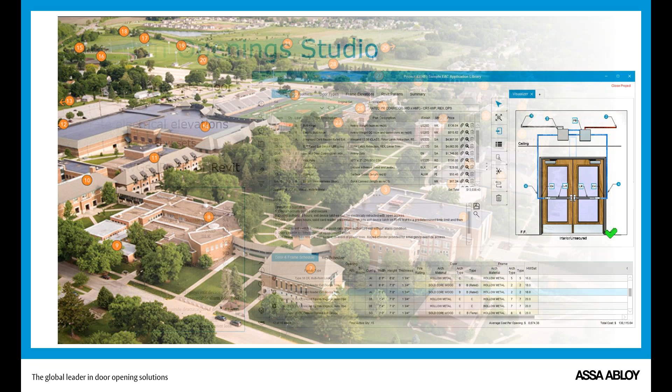So what do we have available? Openings Studio is the software program ASSA ABLOY created back in 2009, primarily as a specification writing tool for our spec writers. For commercial buildings, we would manually enter information into Openings Studio. We would select a product—on this sheet you can see the hardware set parameters.

Each of these are hardware components—so this is 4-butt hinges, 2 electrified hinges, an integrated lock set. We would manually enter all of this information into Openings Studio, which would produce the Word document you'd see in a specification section.

We quickly found that there was a way to incorporate and tie our efforts more closely to what the architects were doing.

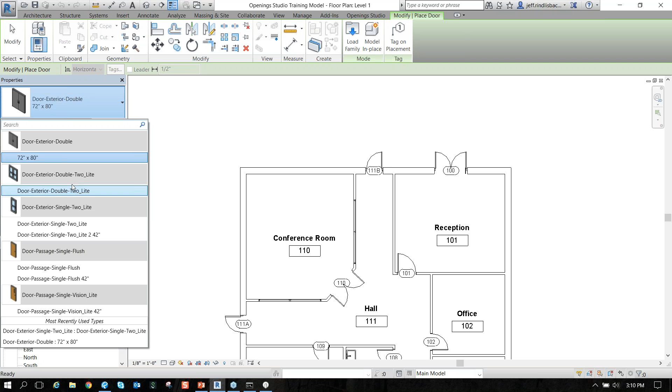Many of you may be familiar with Revit. This is Revit, and when an architect wants to add a door—say to this conference room—they would go to the Architecture tab in Revit and select the door category. Here at the top left corner are all the doors available out-of-box in Revit for this project. So if I wanted a double door that was 72 by 80 inches, I'd select that door and simply drop it right there in the plan.

This is standard practice. A lot of architectural firms have done detailed things with their doors—they may use a combination of out-of-box Revit doors, but also go to great extents to create door families, which is what these little things are. Every element in Revit is a family.

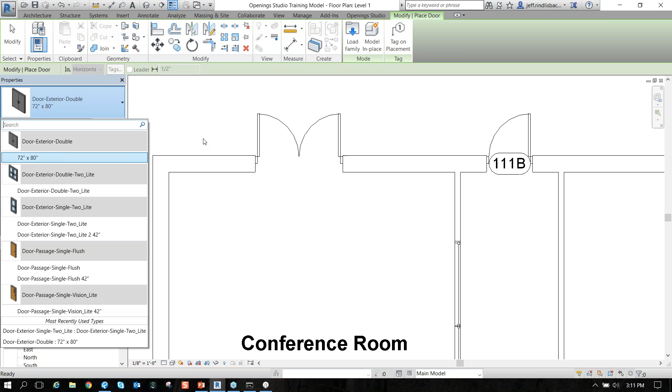So this wall, this door that I'm on, is a door family. This wall is a family. If I wanted to choose the window in that wall, that's a family too. So a Revit model is made up of several families.

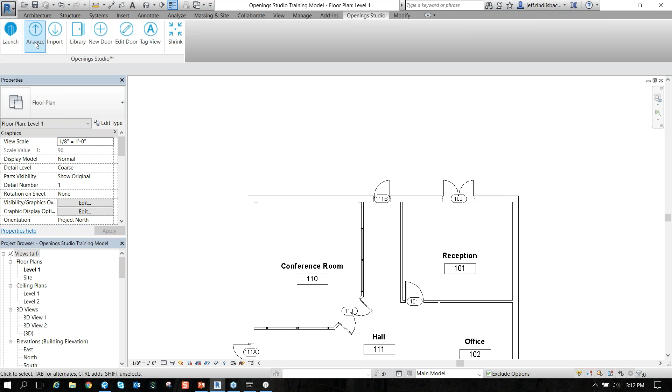So what we came up with is a way for an architect to send us detailed information about their project through Revit. Up here at the very top, you can see this tab called Openings Studio. By selecting that tab, the architect can analyze their job. Openings Studio goes through and looks at all the doors that are in the door category.

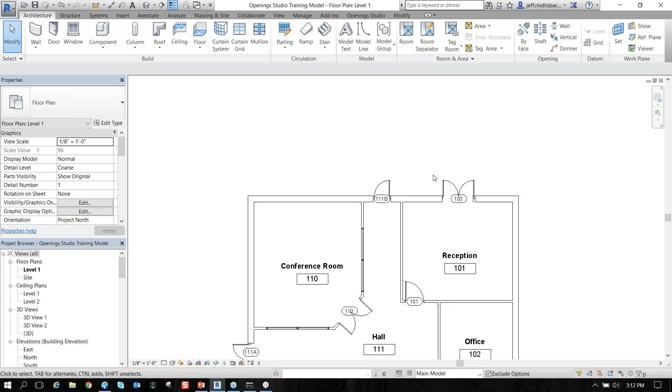So all of these elements that are in the model, these families that are in the door category, are going to be picked up by Openings Studio. In addition, the geometry for this project is also going to come in.

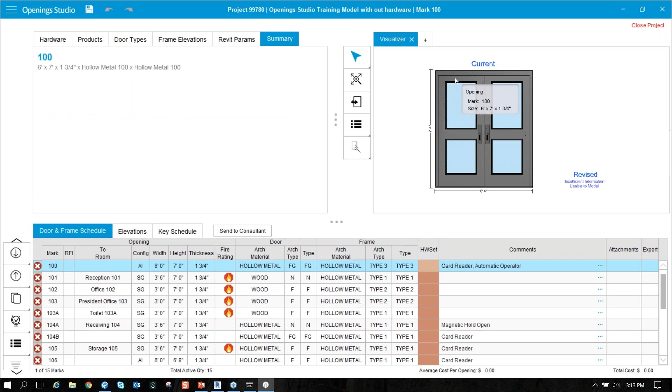So this is what Openings Studio looks like when a project is first analyzed by an architect. Up top is all the door details, the opening details, broken up by hardware sets, hardware products, door types, frame elevations, and at the very bottom is our door and frame schedule. At the top right is a visualizer that lets you see what door families the architect used in their Revit model. So what we do with projects like this is we take the plan views that we get and the door and frame schedules.

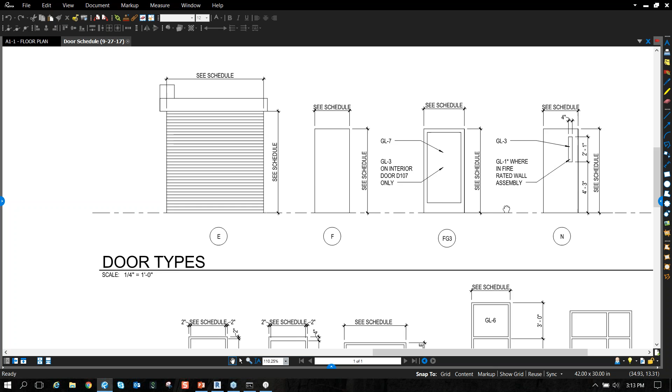We look at the elevations of the doors that the architect has created. Many of you have seen something like this - there's the flush door, a full glass door, a narrow light, and the different frame elevations. So what we would do in Openings Studio is make those into industry standard door families.

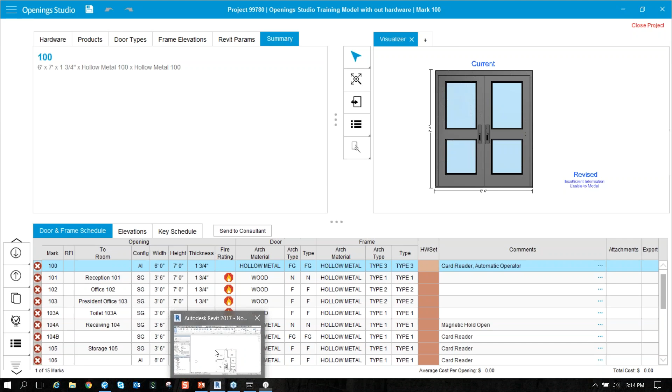Once that's done, we have a really powerful tool to help push additional information downstream. Architects will oftentimes share their models with a general contractor. If they don't share the models and you're working with a general contractor who's using Revit, they may redraw the entire building and have that available for the as-builts. So when they do share that model, and when the project comes into Openings Studio, let me show you what this looks like.

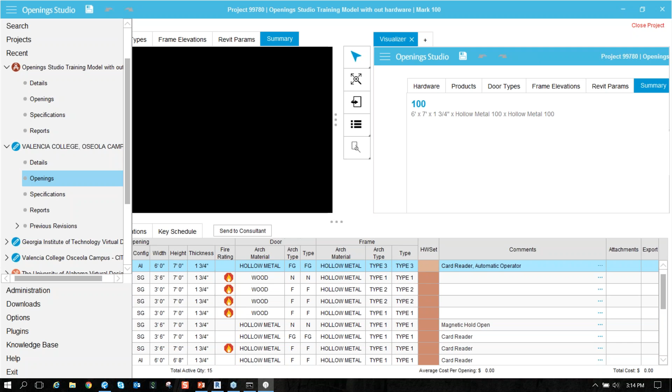This is a project that has been completed, so the hardware sets have been assigned.

So you can see here, down here at the bottom, is opening 100. It has all the detailed information about the door - it's a 6 foot by 7 foot, 1.75 inch hollow metal door with a hollow metal frame. It has hardware set number 6, and it even gives you a description of what hardware set 6 is: a pair of egress doors that are in a corridor, and they have access control.

You'll see right away that there is a power column in this summary page, so anything that has a lightning bolt in this screen is an electrified product.

You can also see down here at the bottom is the notes - these are operational narratives that are assigned to each hardware set. So for this opening, doors are normally closed and locked, and entry is by presentation of a valid credential to release outside trim, or by mechanical key override.

Each of the products that exist up here in the summary are hyperlinks. So if I were to click on that hinge, if I wanted to see exactly what that hinge is, all I have to do is click it, and it gives me the detailed information about the T4A3786 or T4A3786, along with the electrified components for that product. And again, they exist for each line item that is highlighted in blue as a hyperlink.

So one of the things that happened when we met with the stadium, and also the college and the healthcare facility in my examples - we met with you as facility folks, owners and representatives, to establish what your standards are, and we would write hardware sets around those standards. I want you to remember that for a portion of the presentation that's going to come up in a little bit.

The other thing that happens - I explained that the door that comes in automatically from Revit, the door on the left in this visualizer pane, is the door family that the architect has used in their model. Remember that every element in an architect's model is a family, so this is the door family that they chose for this location.

What we do is take that door and frame elevation sheet, and we try and match it up with something that is industry standard. So in this example, the architect chose nomenclature like an F door for flush, but if they were to call these something different, we would convert that into something our industry would understand, all the time maintaining the architect's door type and door material, frame type, and frame material. We would just convert that into something understood by our industry.

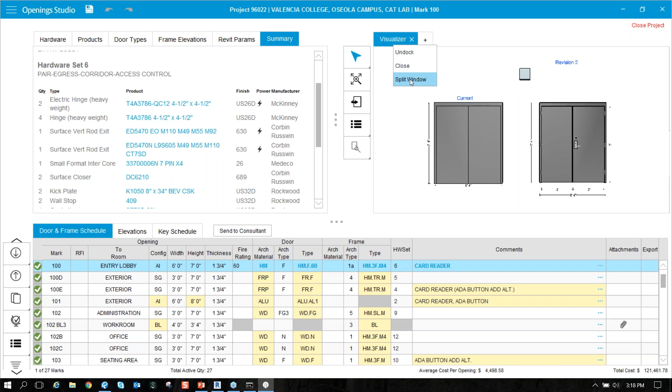In addition, and this is where the detailed information comes in really handy - one of the things you can do with a project that comes from Revit is adjust the visibility and how you see these openings.

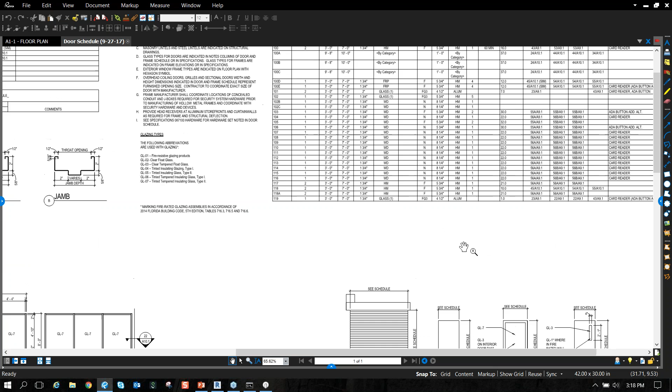So I was in a meeting last week on the phone with an architect, and we were trying to do that dreaded door-by-door meeting that went through each of the access control locations, and then they wanted to go through the fire-rated locations. The architect was sharing their screen with a PDF of the hardware sets and a PDF of the door schedule, just like this. What he wanted to do was go door by door on the door schedule and make sure we had covered each of the doors.

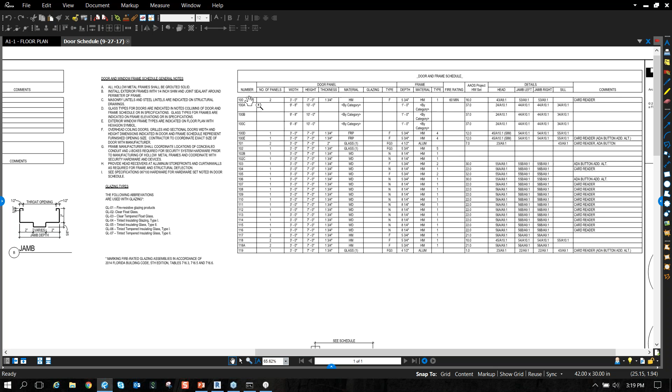So what he would do is use this document. He would find door number 100, and see that it was in hardware set number 16. Then he would go to the PDF of the hardware sets and try to find hardware set 16, which would identify what hardware was required for door 100.

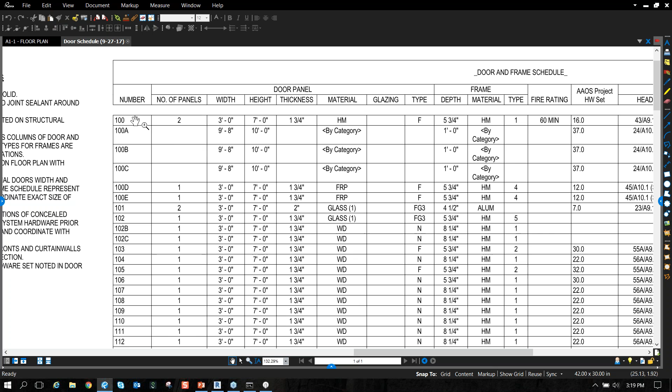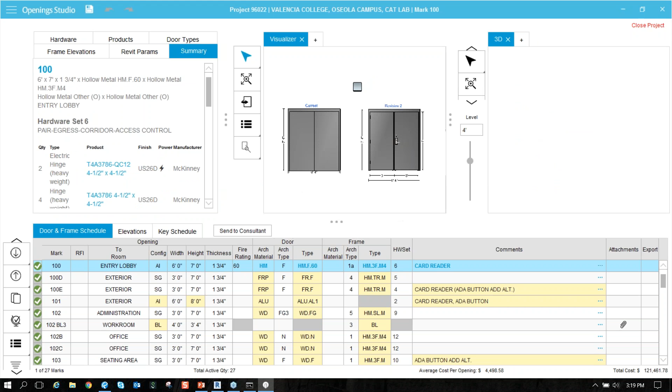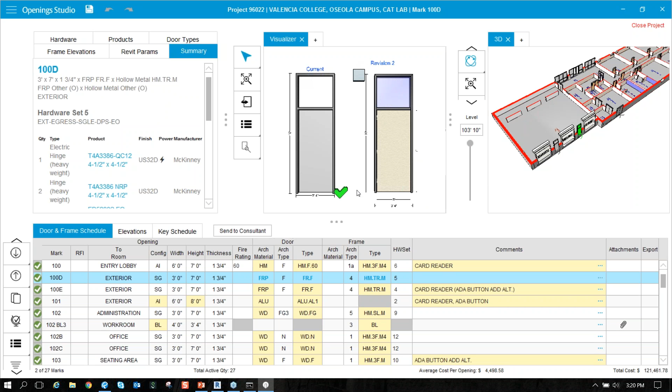When you select an opening down on the door and frame schedule, it actually highlights that opening where it's at in the floor plan view. It shows you the current family that the architect used, and then the revised family, or what we as a specification team are interpreting that opening to look like.

These doors can be flipped around. This happens to be a door coming from this training area, and the architect had asked for it to be exit only—you can see the hinges on the door. It's an FRP door with a piece of glass, a transom panel above it, but the exit device is exit only with a parallel arm door closer.

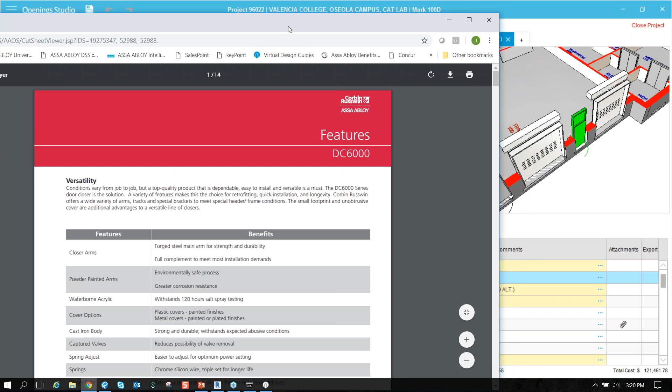If you wanted to see what that parallel arm door closer was, you could click on that DC 6210 to see the cut sheets that are loaded in. The other thing you can do is click on installation instructions.

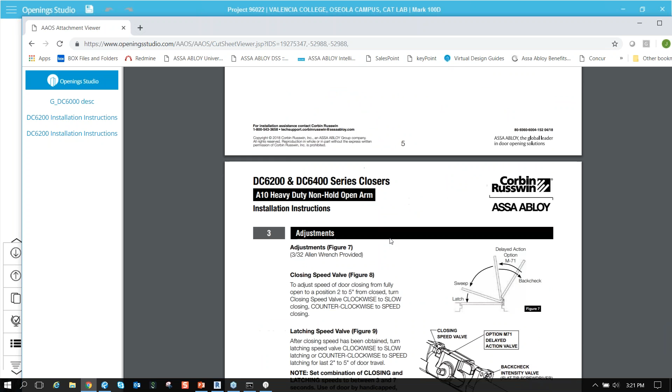So if you wanted access to the installation instructions, which include the adjustments—if you're being asked to go out to a door because the closing speed or sweep speed is too fast, you can utilize the information in Openings Studio by clicking on the opening they've told you is a problem, then select the component or piece of hardware in question. Any of that information loaded in here you could access from your mobile app and see exactly how to adjust that door closer.

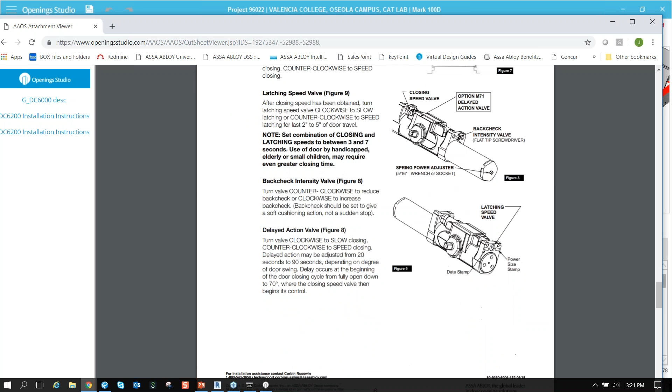The other thing that can be done with this is warranty information can be loaded in, and I'll show you that in just a moment.

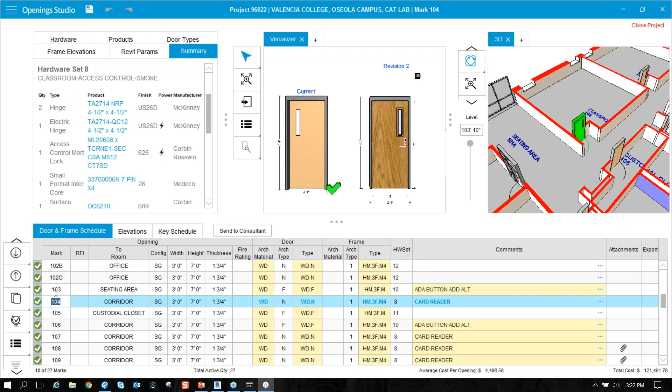So we can load in access control information about these doors. Like I said, we can do warranty information, cut sheets, or wiring diagrams.

The other thing that happens with this is we allow security consultants to utilize the information in Openings Studio. So if we've written the specification and a security consultant is on the same project, we would allow them to collaborate.

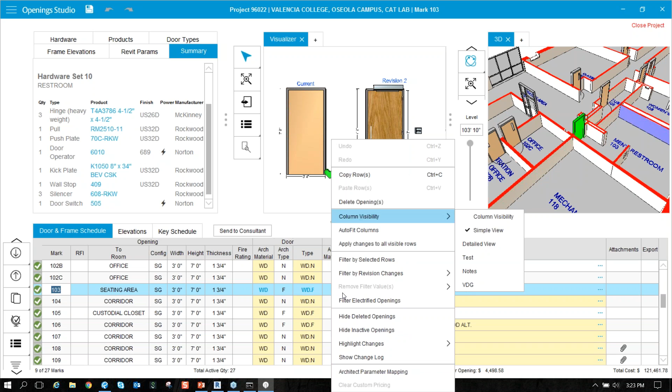One of the first things you can do with the door and frame schedule is right-click down below and filter by all of the electrified openings. That's going to look for that lightning bolt in any of the hardware sets that exist in the project, and if that lightning bolt exists, it's going to include that door in the schedule down below.

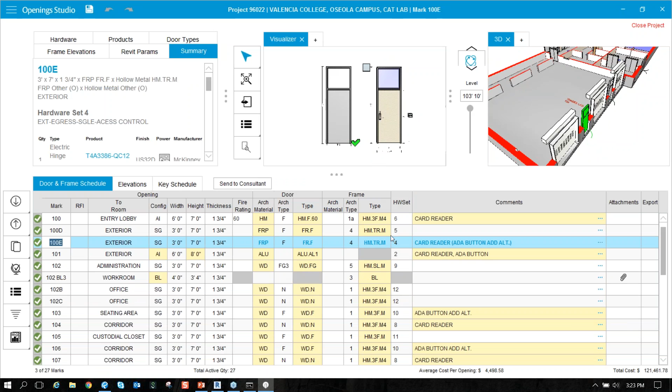So we can quickly see that some of these share the same hardware set. We could even filter by just the hardware set that we want to see. So if we wanted to clear the filter, we could clear it out and just filter by hardware set number 1. And we're only going to see the door that has hardware set number 1.

So this door happens to be an exterior door. It does have ADA operators. Let's see what else is on the opening. So we've got standard door pulls with an exit device, the ADA operator, a power supply that is running the latch retraction of the exit device, and this exit device has a built-in request to exit.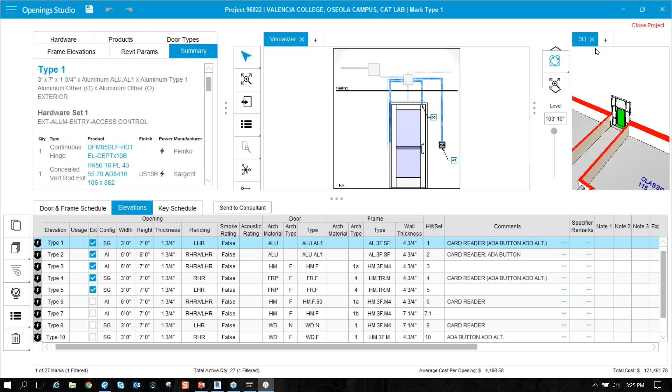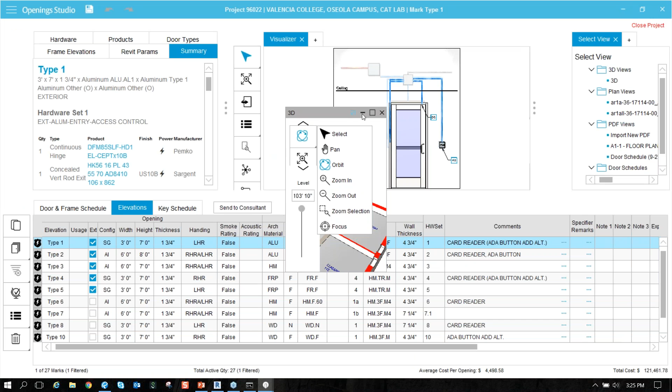So if I scoot this in, maybe slide this over just a little bit, each of these screens can be undocked. So if I wanted to undock that and maybe put this on a separate monitor and have everybody look at this screen while I'm going through the door and frame schedule, it just keeps everybody kind of on focus and on task. If we're just addressing access control doors, it allows us to address the access control doors, and that's it. So each of these can be undocked. You can redock them and it will go back to where it was.

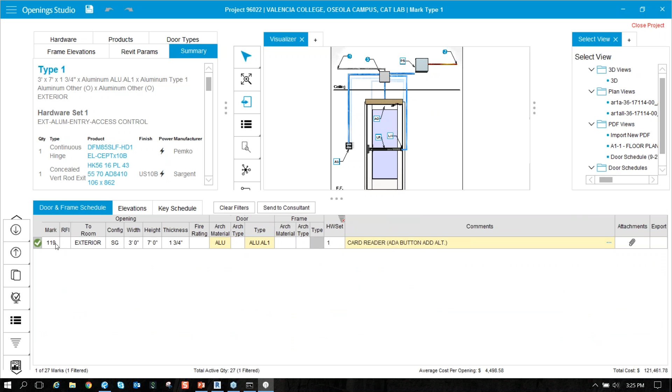So let me show you the electrical elevation. Again, this can be flipped around. So what it's doing is it's taking the door and frame information that exists for opening 119, and I created a new elevation for it. And now our security consultants can collaborate on this, and they're using the hardware set that came directly from the specification. So they've got the same hinge, the same electronic exit device, same door pulls, same mechanical hardware.

It also includes wiring diagrams, so there's the wiring diagram that goes with that product. But it gives them an elevation view of how the opening is going to be wired up.

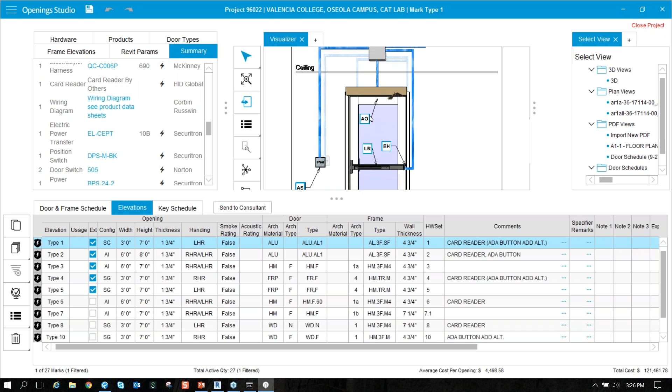In addition, it tags each of these components. So if I were to see this, AS is an actuator switch, so it's an ADA actuator. LR is latch retraction. EH is an electric hinge. AO is an auto operator. And these come with a legend that would explain what they are. The PS, the power supply - you can flip the door around and you can see that, again, it has the AS and the door contact. So we've created electrical elevations for each of these openings.

And one of the things that I know about access control is that not every facility wants these access control doors to function the same way. So the operational narrative and this visual are a powerful tool in making sure that things not only have power where they're required to have power, but are going to function in the field the way that they're supposed to function.

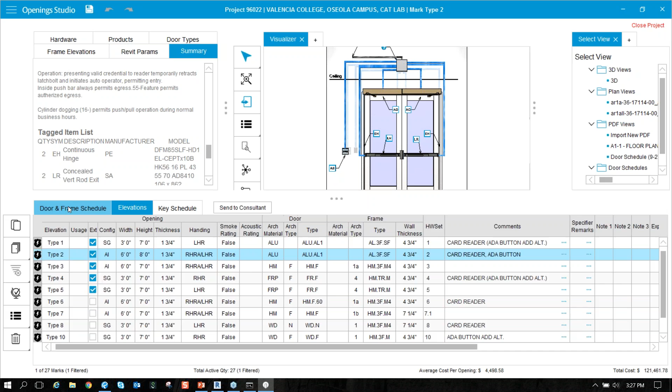So this operational narrative came directly from the hardware set assignment that's in the door and frame schedule. But that information can be shared with the electrical elevation. So now our security consultant or low voltage contractor is working off the exact same information that's included in the specification.

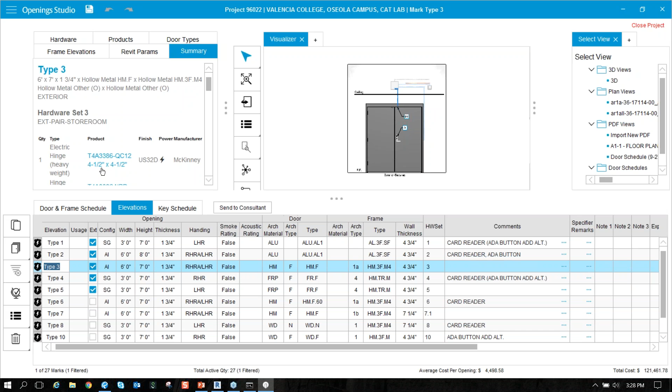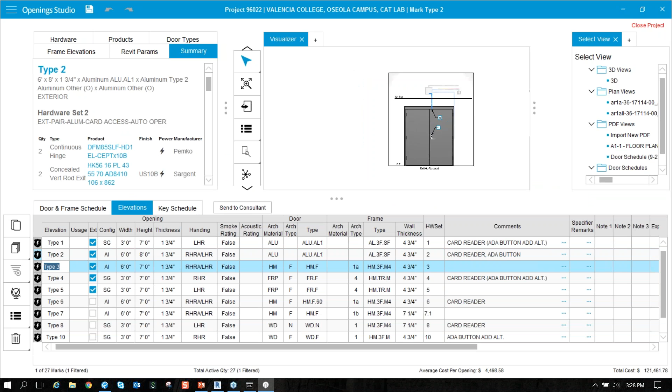These can be inputted, or the export of these - I can print these to a PDF. I can even print these to a Revit file, and bring these in a sheet back into Revit. And again, this is for our security consultants.

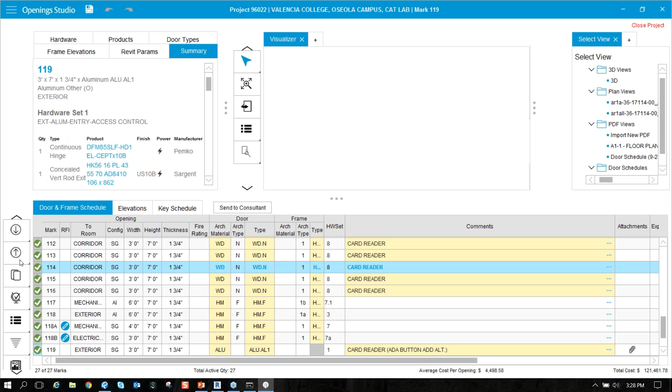And it's very easy to create one. The way that it works is once the hardware sets are assigned, if I were to come down here to the bottom and add a new electrical elevation for an opening - I'm creating an elevation and I'm calling it delete because I want to delete it. Once I'm in that electrical elevation, really the only thing you need to do is click this little button right here and it automatically labels things for you.

That's as simple and easy as it is to do.

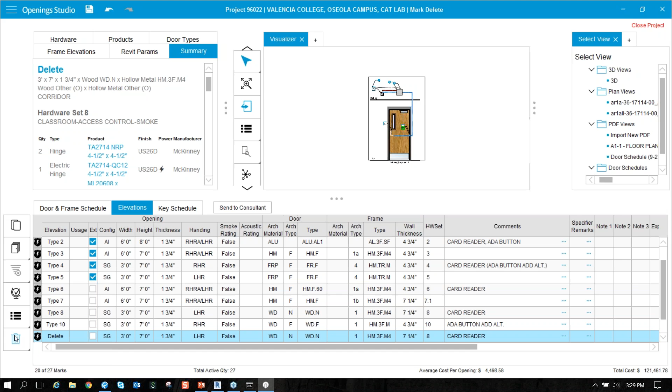Something else that's new is this keying schedule. What this does is put in numerical order all of the openings that exist, and it highlights any of the products that are keyed, allowing us to put in key symbol and operated by—a narrative of how that opening is supposed to work—plus the bitting information if you chose to do so.

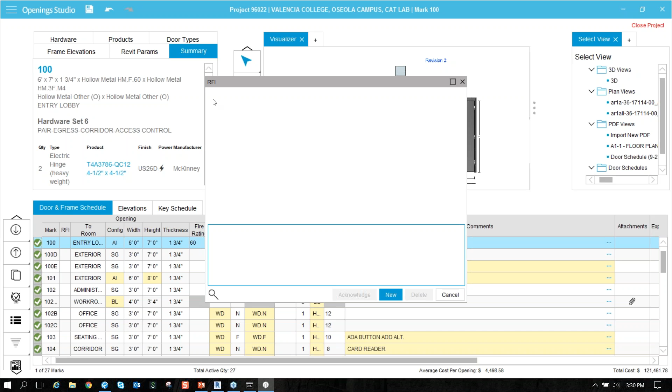The other thing that is extremely valuable is this RFI column. It's used a couple of different ways, including during the DD and CD phases between our specification consultants and the architect to iron out issues. So if a card reader needed to be added, the architect could click on the RFI column, type in 'add card reader per Paul Walker,' click new, and it would create that RFI.

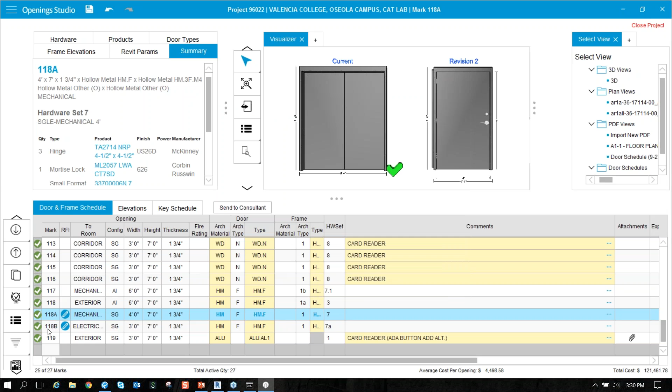I added two RFIs to this project because in the documents that came for this project, opening 118A used to be a pair, now it's a single—a 4070 single—and door 118B was added to the project. Within Openings Studio, I made those notes in the RFI column, changed it to a 4070 single door in Addendum 5, and the same for Opening 118B, added as a 3070 left-hand reverse door in Addendum number 5.

I bring this up because this RFI column could be used by you as you're collaborating with an architect. Many of you have been asked to review, not shop drawings, but the specifications before they go out to bid. This would allow you to have all of that information right at your fingertips.

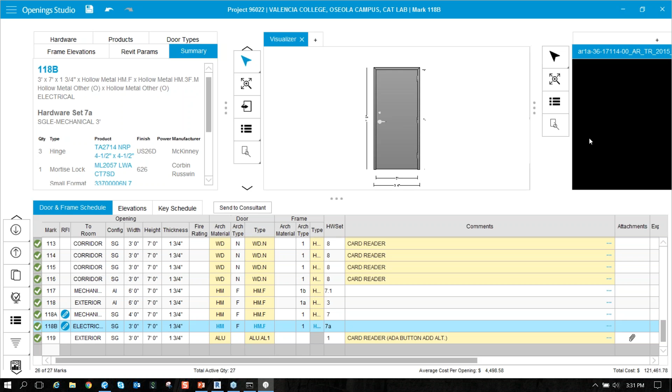The plan view isn't the only thing you can see—you can also see a typical building view, and this is interactive both ways. You can click on a door in the plan and it will take you to where it's at in the door and frame schedule, showing you that detailed view, or you can click on a door down in the door and frame schedule and it will take you right to that opening.

So when you are being asked to review for compliance—that not only are your standards being met, but card reader locations are where they're supposed to be—all you would need to do is log into Openings Studio and start at the very top of the list. This is a simple 27-door job, so it's not real difficult, but you can simply start at the top of the list and work your way down.

You can quickly see, oh, that's that door, it's the exterior door, the one that's exit only. This one was the one we had discussed that needed to be a card reader location, so that's where they're going to funnel people in. If you had a question on one of the products—what is the auto operator being proposed? It's the 6000 series by Norton. Great, that's what we talked about. Any other information you would need is right here at your fingertips.

The other time this comes in handy—well, we'll get into that in just a moment. So you can use Openings Studio to do your reviews at either the CD or DD phase, whenever you're being asked to review the specifications before they go out to bid.

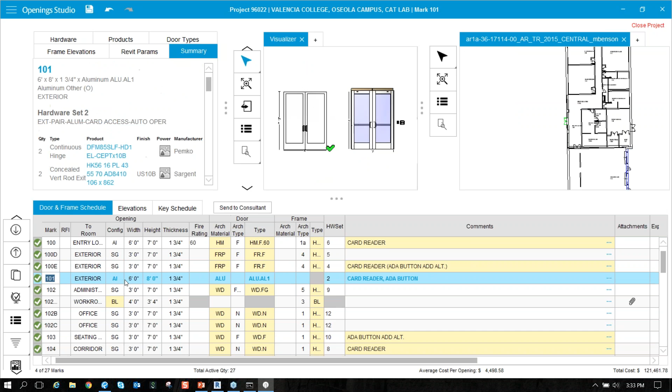Another couple of neat features about the program: first, anything highlighted in yellow is a change from the last time the architect sent the project to Openings Studio or used the Analyze feature. This is really helpful, not only for specification writing, but for you as individuals—if you've reviewed it once, and now this is the second time you're reviewing it, maybe you spot check a couple of these, but focus on the highlighted yellows to make sure they are in fact what was asked for or needed for the project.

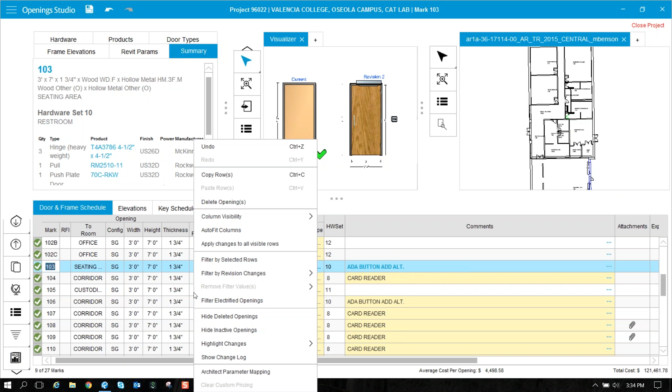There are all sorts of reports that can be run from Openings Studio. You can do a comparison report comparing one version to the other to see what changed. You can also show the change log, and you can create a custom filter, so if you wanted to filter by any of the new openings or deleted openings, anything that's a pre-existing opening.

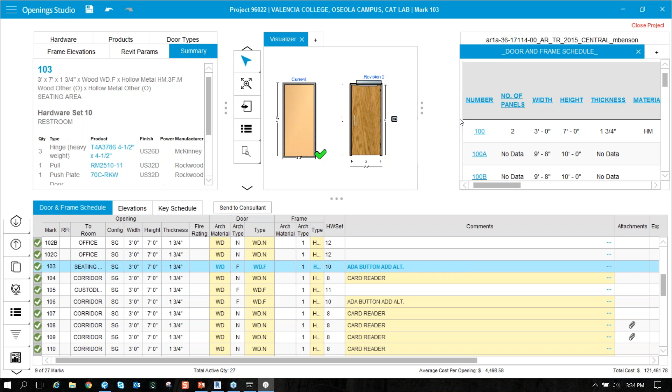One of the other views available in the software is the door schedule view—this is an interactive door schedule. You'll notice the blue highlight; these are hyperlinks. Again, when you click on the door here, it'll take you to where it's at in the door and frame schedule. This allows us to filter the schedule shown below, which is extremely helpful when dealing with a project that has more than one door schedule.

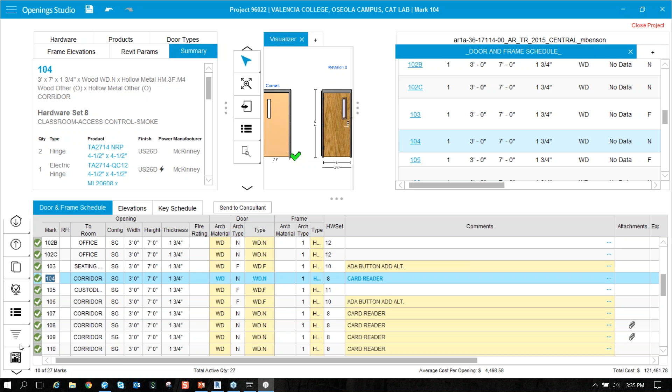If you just wanted to focus on doors that were on the first floor, and there was a first floor door schedule, you could come down here and do the schedule filter, and it will give you a list of each of the door schedules created in the project. In my example I've only got one, but if there were two or three, all you would do is click on filter, then filter on selected schedule, and it would drop off any door that was not on one of those door schedules.

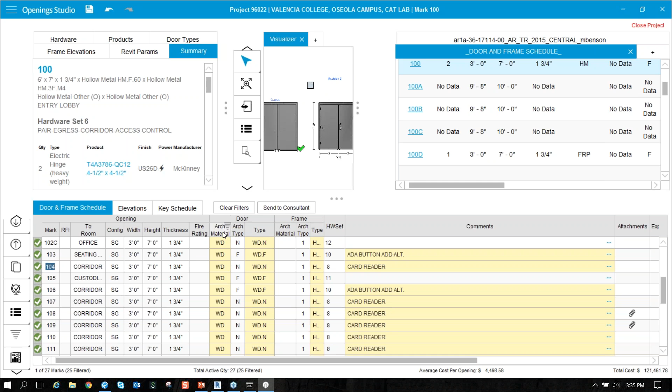Extremely helpful in navigating and isolating, drilling down to see just the openings that you want to see. If you've been asked to view all of the wood doors on the project, you can filter by any one of these columns. So right now I've got only the wood doors being filtered.

If I wanted to isolate the doors that just had card readers, now I've got two filters turned on, one by wood door and the other by card reader, and I can make global changes to each one of those. I could even turn on this button, which is an apply changes to all visible rows.

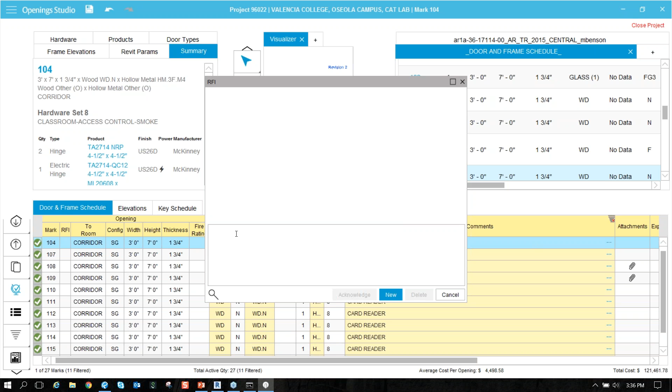When I do that, the top of the door schedule turns yellow. And if I were to add an RFI, so if each of these doors that were wood and card reader needed to change to hollow metal, I could say, please change this door to hollow metal. And when I hit new, because I've got the apply changes to all visible rows on, it's going to put an RFI in there for every one of those doors that's on the schedule.

Okay, so we've talked about specification writing. ASSA ABLOY writes door hardware, door frame and hardware specifications. We have a really unique tool allowing a contract hardware distributor who's supplying a project to upload the as-supplied information. So this right now is as-specified. We can actually pull in the as-supplied information into this project into Openings Studio.

So what does that mean to you? That means when you come in here and you get a phone call from somebody that says, my classroom door, this morning I noticed that there was oil leaking down the face of that door. Rather than going to the door to verify that the oil was leaking down the face of the door, you could log into Openings Studio, click on that door.

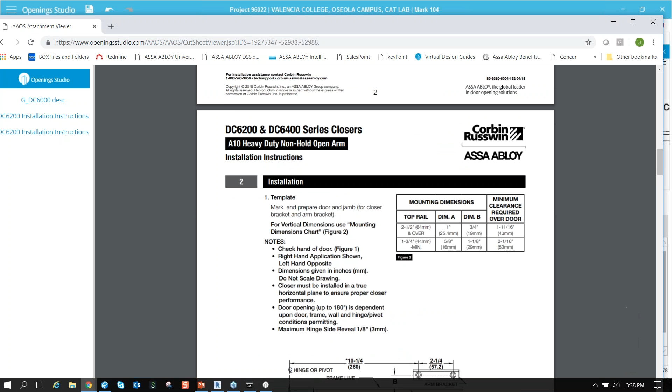You can see the opening and what it looks like, and you could actually click on that DC6210, get any installation instruction or adjustment instructions. But even more important, you're getting the product number, DC6210.

You can see that it's a left-hand reverse door. You could actually throw a closer body if you've got one in the shop. You could throw that closer body in the truck, go to the opening, and maybe eliminate the need to go back a second time. And you can do that with everything.

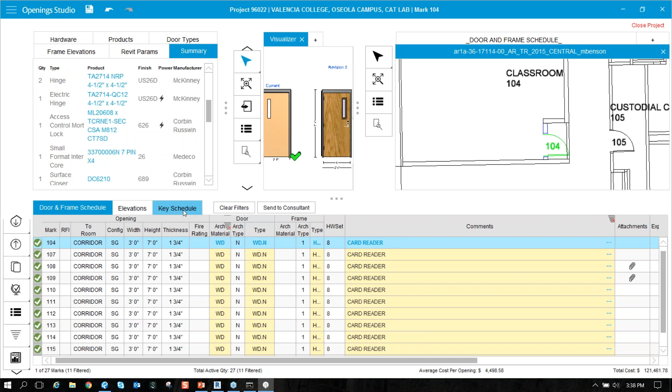The keying schedule - if a key breaks off in door 105, and you need to know how that's keyed, as long as the information is provided by the distributor and can be updated, then the information that's in Openings Studio is now the as-supplied, not the as-specified. And that is true with our electrical elevations as well.

So with that information, with the information in Openings Studio now changed to as-supplied, we're ready for the next step, and that is to apply QR codes to each of these doors.

So one of the functions in Openings Studio is to print smart tags, and what that will do is print a tag for every line item in the project. What you would do then is switch from the desktop version of Openings Studio, and log in on your smartphone, either a tablet or a smartphone.

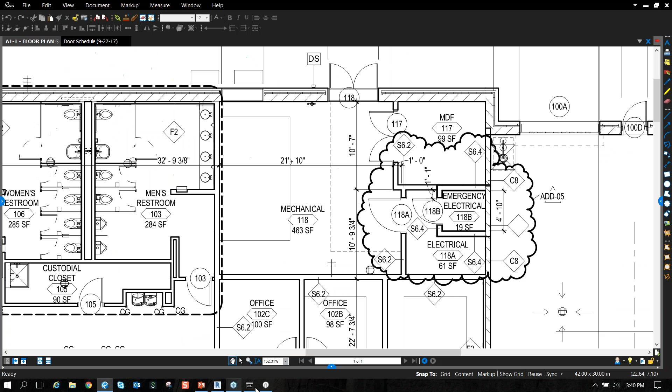You would then go to the opening, and this can be done by the general contractor, by the distributor, or by you. What you would end up doing is at the opening, you would stick the QR tag on the door frame. So you stick that QR tag on the door frame, and then you can scan that QR code.

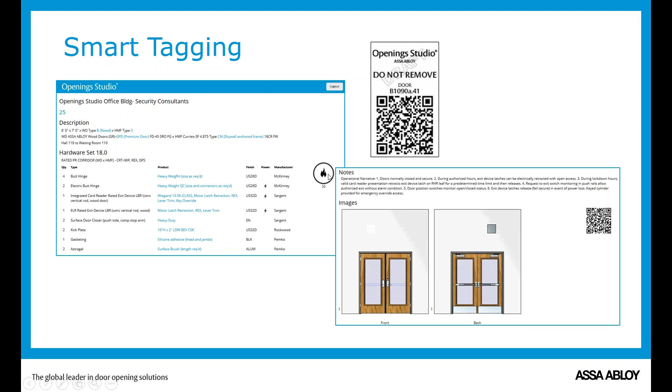So once that QR code is on there, it's what it'll look like. This is a project that we did in Florida. This is door 119, this is door 108.

Once you get that QR code, you could scan it and it would take you to this screen if you didn't have access. If you do have access, your screen is going to look a little bit like this. You'll see that it's more information, more detailed. This is door 119, same door.

So this is the opening level. The button here is the edit button, this is the copy button, this is the notes, and up here are the survey or inspection buttons, and then this is the ability to scan a QR tag.

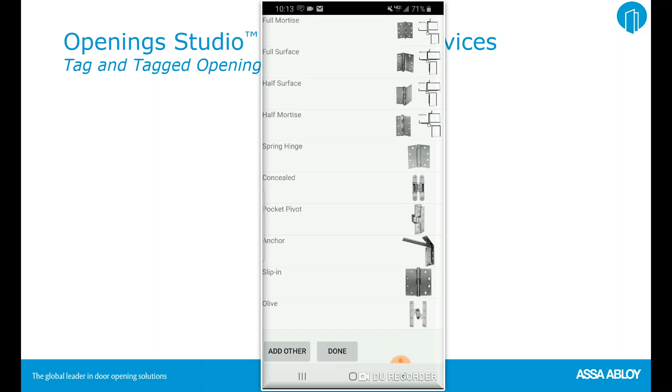Down at the bottom, I need to add a piece of hardware that doesn't exist, and I chose a hinge. So you click on hinge, you click on the hinge type, it's asking if it's full mortise or full surface - I choose full mortise. Enter the quantity in, enter the weight, standard or heavy weight, and then any of the sizing, and then any of the options that are available for those hinges.

And then when I'm done, I click OK, and it will take me back to the opening screen, and now that component or piece of hardware has been added to that opening.

The other thing that's available with this mobile app - so we've now stuck a QR code on the door frame, and now we have an opportunity to either do a site survey or a punch list or an inspection. So the very first thing, again, it's at that opening screen, and I clicked on the little inspection button. What I've got available is a new fire door inspection, a new smoke inspection, an egress inspection, or if I'm the general contractor, I can punch out the opening.

So I choose fire door inspection, and I go down and find that the lock set is not compliant. I click on the lock set and say that it's missing or damaged - it's got damaged fasteners. And I go down to the closer and make a selection there. When I go back to the front, it tells me exactly why my opening is deficient.

And it's missing those things. So this would allow you to print out a report of each of the openings and what needs to be done to them. The nice part about this is you don't ever have to say 'at opening 119, this happened.' When you're logged into the app, because you're on opening 119, anything that you say or do to that opening, it knows that it's on 119.

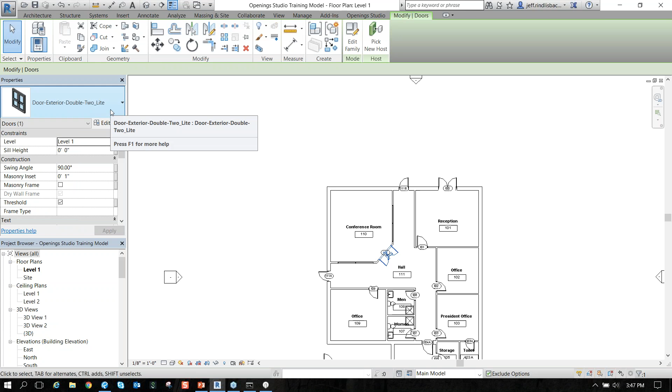Now comes the fun part. And that fun part is where the stadium and the college that I talked about are utilizing this information. Many of you may have BIM standards in your specifications where a certain level of BIM content is required to be turned over. I would ask, why not have that BIM model, rather than generic doors available in Revit, updated with as-supplied information?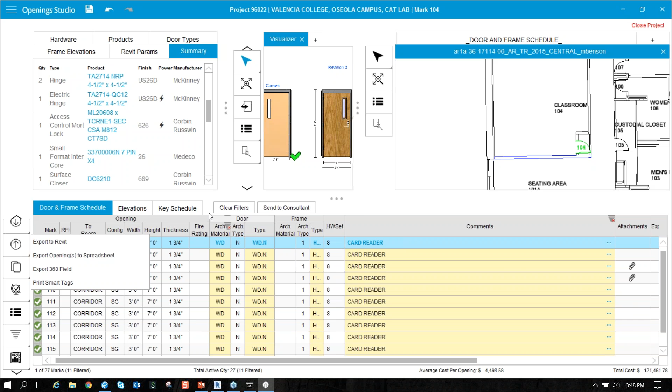So one of the key things about Openings Studio is that once we have the information captured in Openings Studio, I can export this information back to the Revit model. And that information includes the hardware set number, but it also includes the tags that exist on the electrical elevations. So if I wanted these door tags to show up—this card reader, lock and door contact—those could show up in my Revit model. And the hardware components themselves can be sent back to the Revit model.

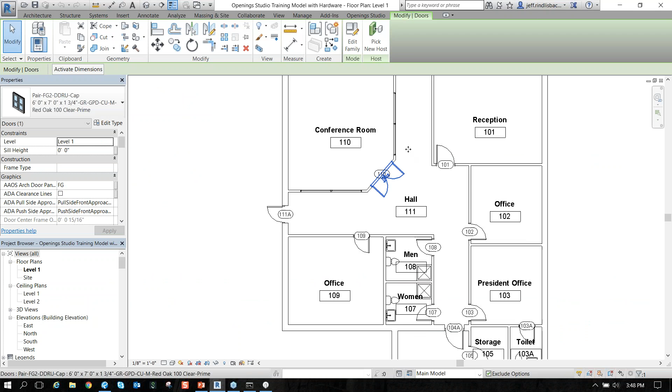Many of you use programs to help create work orders, and if the app or program you're using is pointing toward Revit and extracting information from it—if these doors, which are ASSA ABLOY doors with ASSA ABLOY hardware set numbers and tags assigned to those openings—if that information is in the program, then when you point your apps at Revit, the hardware set numbers and hardware products are going to be available for you to use.

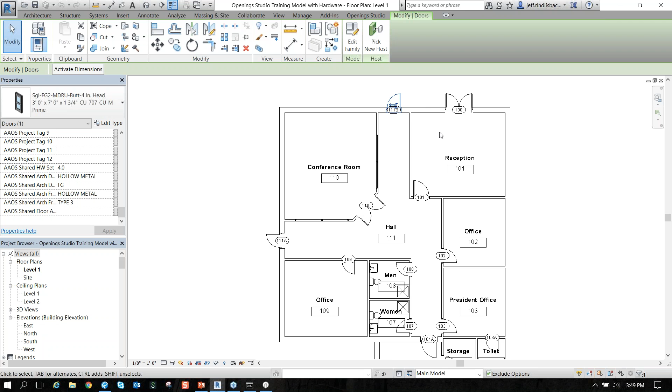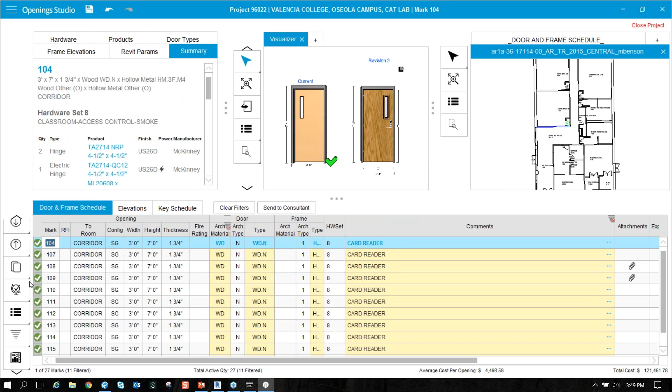So the last thing I want to talk about is what we can then do with a project like this. Essentially, what we've done is capture some pretty difficult openings to communicate. I'm sure many of your facilities have design guides in place that represent your standards and what's to be used and when. What we can do is take this information—this is now as-supplied information, real world stuff, and it's on some pretty detailed, complex openings to communicate to an architect.

What we can do with this is create a library in Openings Studio and turn it into what is called a virtual design guide. A virtual design guide is a project in Openings Studio that is just visible in a bit different format. So it would look like this.

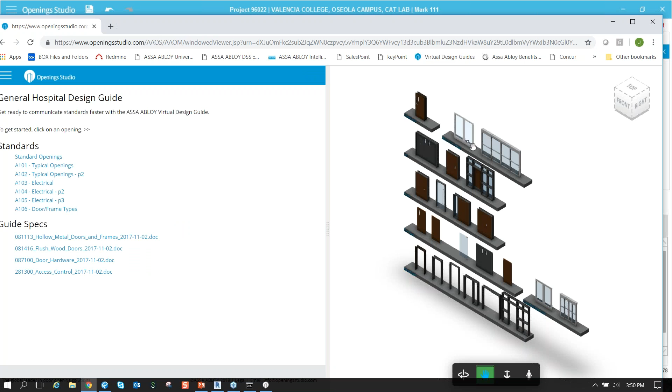So if I click on an opening here, you can see that these images look a lot like the images that come from Openings Studio—it's because they are coming from Openings Studio. So what this does is, I click on this door and it shows me the door number and its description, and here's the hardware set with the operational narrative.

So what we would do is work with you, and ask some tough questions about door hardware, like what doors on campus you go to on a regular basis that you want to make sure never happen again on any project moving forward. Within Openings Studio, we would create a new door family and provide the solution to that problem. And in the operational narrative or the notes, we would say this door family is to be used at all cross-corridor doors.

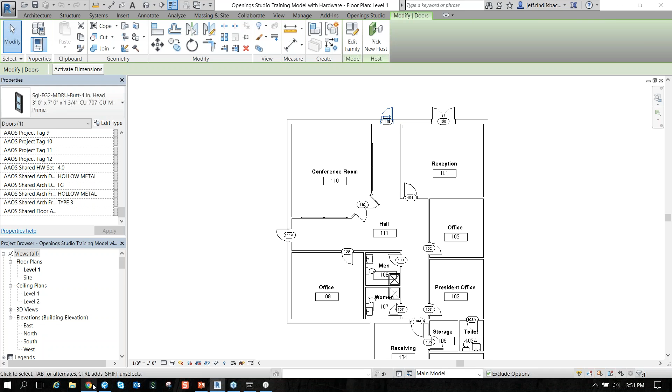When we create it in the virtual design guide, the virtual design guide is going to read that exact same information: use this opening at all cross-corridor doors.

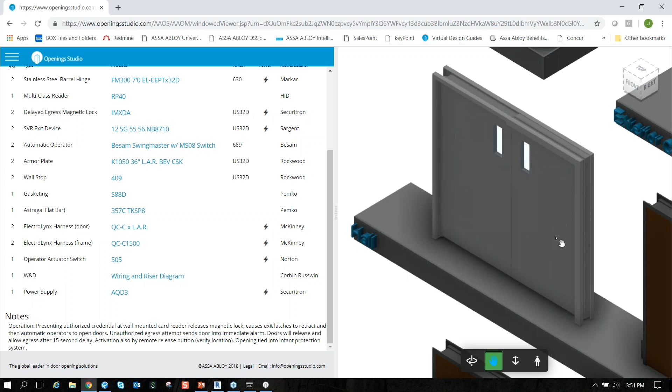One of the best features is that as an owner you would share this with an architectural firm and say, these are our door families. They represent all of the components that make up the hardware sets, with detailed information about the door type and frame elevations. I want you to use it when you start your next job, rather than clicking a new door and choosing from the doors available in Revit.

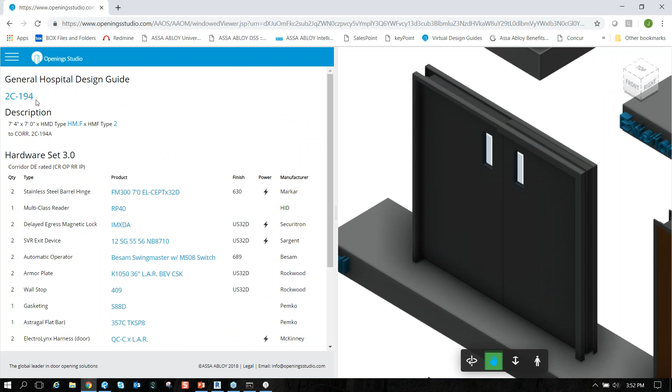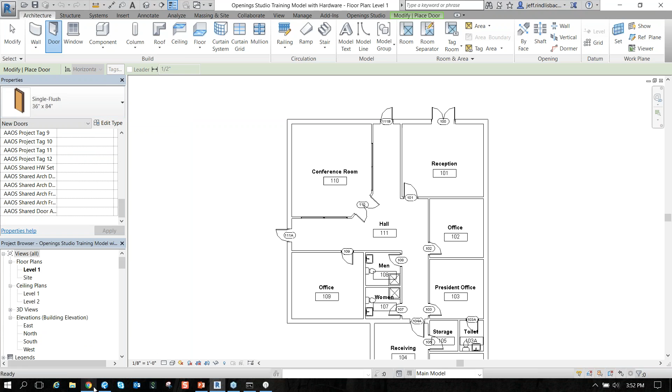We can actually send each one of these doors and export it to Revit. So these door families, whatever they're called—this one is called 2C194—when an architect downloads those door families, they would click on door, see that door, and drop it. So if I had a cross corridor door, I'm grabbing that cross corridor door and placing it exactly where it needs to be.

Obviously, we can write specifications and we will continue to write specifications, but we can offer so much more. I think the most important thing I'd want you to remember about this presentation is that we need to start somewhere. I shared the three stories about the stadium, the healthcare facility, and the college we did. All three started the Openings Studio journey in different phases.

To recap, we can provide as-built information back to the Revit model if needed, or that information can reside in Openings Studio for you to digest as you'd like. We can greatly enhance not only the look but also the coordination of your access control locations.

The punch-out is tied directly to the products that are in the specification and as supplied. We give you the ability to make a change to an opening, which means that even if you didn't start with a project in Revit, and we did not write the specification, that doesn't mean we can't start with an on-site survey.

We can use the app to go to a door, click on add new opening, and put all the information in there about the door and actually assign hardware sets that way. We can do annual fire door inspections, life safety inspections. I hope you understand how to smart tag, and how to use the mobile app versus the desktop application.

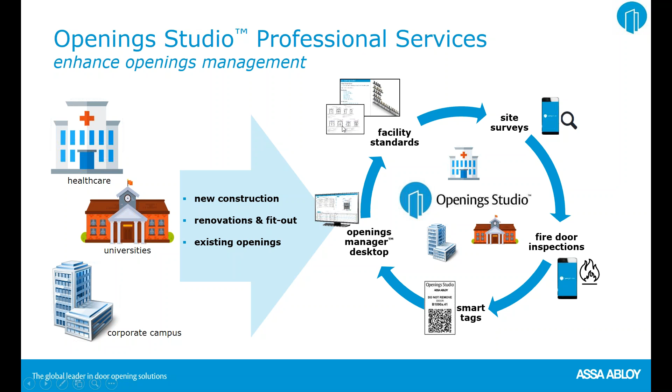But maybe it starts with QR codes—maybe it's an existing facility. We go out, we tag the openings, and it comes into Openings Studio. You can create a virtual design guide, so the very next project, the architect is using the door families you're telling them to use.

So there's potential in capturing door, frame, and hardware information. Again, it's important that we start now. Let's start with the next project. Let's start with your access control locations or your fire doors, and let's get these things into Openings Studio, which will allow you to benefit from all of the other information.

Being able to use it to maintain your facilities, and how to turn that into something that can be shared with an architect that is more powerful than a Word document. It gives them really everything they need in order to provide to you what you're asking for.

Yes, in addition to cutting down on the wire runs - let's see if I can grab that elevation - power consumption is another one. So we've got power supplies that are controlling locks, exit devices that have reduced power consumption. They require less power to operate.

It's going to save, over the life cycle - well, Jeremy can actually provide that information for you. But in addition to cutting down on the wire runs, we've also developed products that are consuming less power. They're making less of an impact on our environment.

Hey guys, sorry, it's Jeremy. I didn't know if you wanted me to answer there or anything more, but I think Jeff, you kind of hit it out of the park there.

Essentially on the install, obviously pulling less wires to the door is a benefit, not only for the people installing, but also on the residual power savings that you'll gain from having less wires and less power draw going on at that particular opening. So there's a couple benefits - one on the install, and even on the procurement side as well. It's a little bit cheaper than your traditional hardwired opening, and then obviously the residual energy savings. So a lot of benefits there for sure.